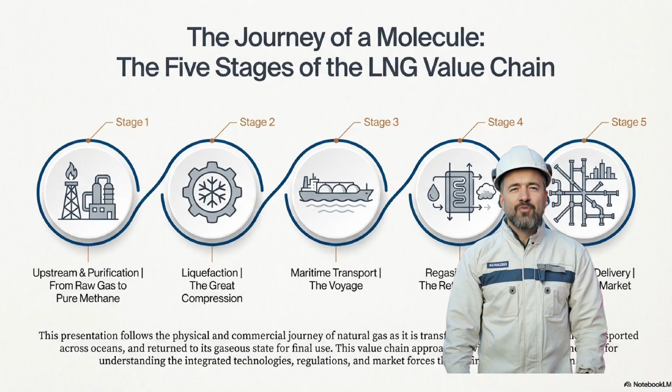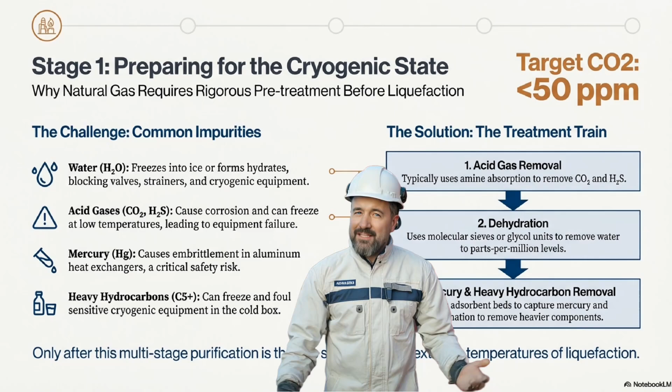Before gas can be chilled, it must be cleaned. This slide highlights common impurities like water, acid gases, mercury, and heavy hydrocarbons, and shows the treatment train: acid gas removal, dehydration, and mercury and heavy hydrocarbon capture that brings CO2 down under 50 ppm and prepares the stream for safe liquefaction.

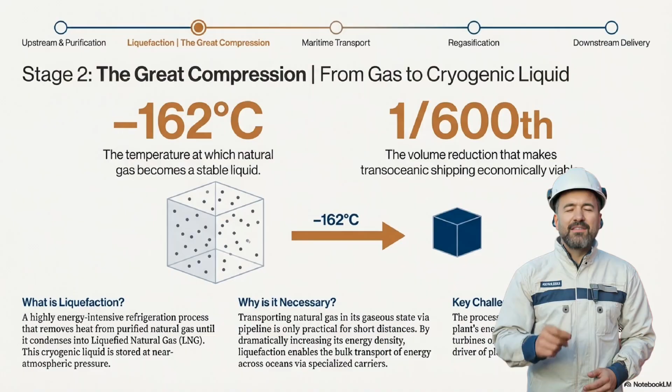Liquefaction is the great compression where natural gas is cooled to around minus 162 degrees Celsius and shrinks to roughly 1/600th of its original volume. This step makes long distance shipping practicable but is highly energy intensive. So, plant design, energy source, and efficiency are central commercial drivers of the process.

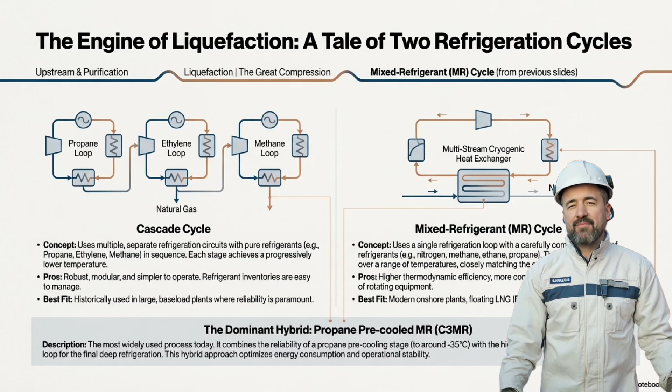The engine of liquefaction uses refrigeration cycles, typically either cascade systems with multiple pure refrigerants or mixed refrigerant loops that match cooling curves more continuously. Hybrid approaches like propane pre-cooling combined with a mixed refrigerant final stage balance efficiency, footprint, and operational flexibility for modern LNG plants and floating units.

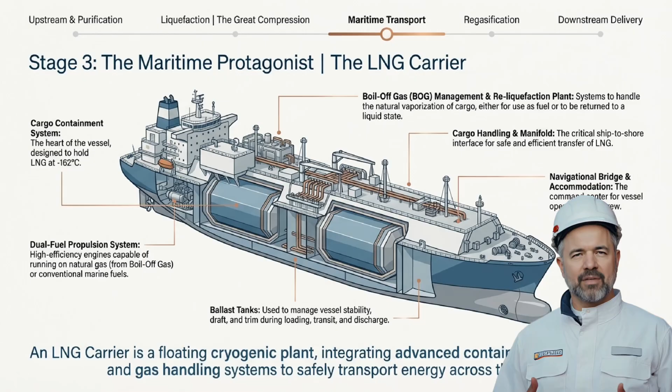An LNG carrier is essentially a floating cryogenic plant, integrating containment, propulsion, and gas handling to move cargo at minus 162 degrees Celsius. The vessel includes cargo tanks, boil-off gas systems, cargo manifolds, dual fuel engines, and the navigational bridge, all coordinated to preserve cargo integrity and ensure safe, long-range transport.

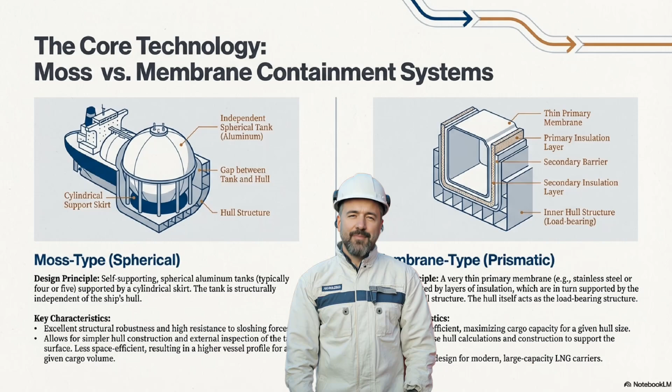Two dominant containment philosophies exist: Moss spherical tanks that are self-supporting and robust against sloshing, and membrane prismatic systems that maximize cargo volume through thin primary membranes supported by insulation and the ship's hull. Each offers trade-offs in space efficiency, structural behavior, maintenance, and suitability for different vessel sizes.

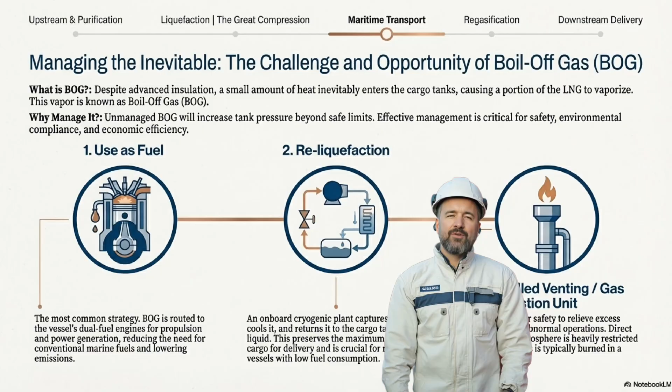Boil-off gas is inevitable as small heat ingress vaporizes some LNG, and it must be managed carefully. Common strategies are routing BOG to fuel the ship's engines, re-liquefying it on board to preserve cargo, or controlled combustion in strict circumstances. Effective BOG management protects safety, economic value, and regulatory compliance.

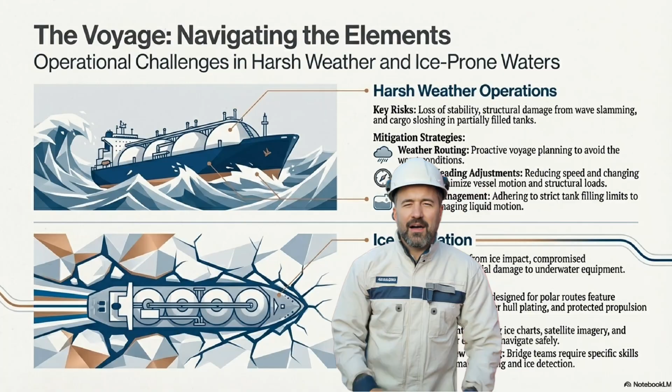Cross-ocean voyages expose LNG carriers to harsh weather and ice risks like slamming, sloshing, and hull impact. Mitigation combines weather routing, speed and heading adjustments, sloshing management through tank operational limits, ice class hull design, specialized crew training, and the use of icebreaker escorts or satellite and charting tools for safe navigation.

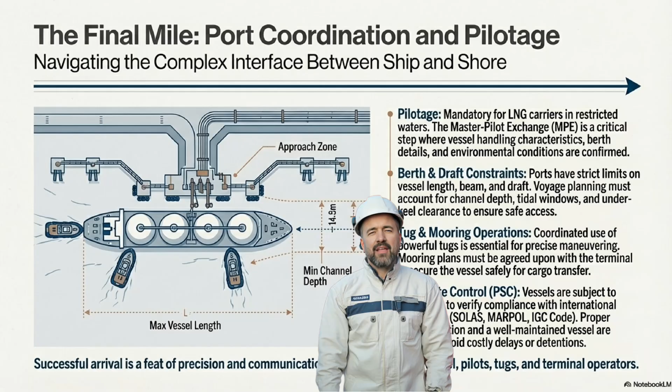The final mile at port demands precision and coordination between ship, pilots, tugs, and terminal operators. Pilotage, berth, and draft constraints, mooring plans, tug maneuvers, and port state inspections must be synchronized to protect safety and avoid delays, because successful arrival depends on clear communication and exact execution.

Regasification terminals perform unloading, short-term storage, pumping, vaporization, and send out to the pipeline grid. Their core job is to return LNG to gas safely and reliably while balancing inventory against downstream demand, which requires tight coordination between ship schedules, terminal capacity, and send-out rates to maintain supply stability.

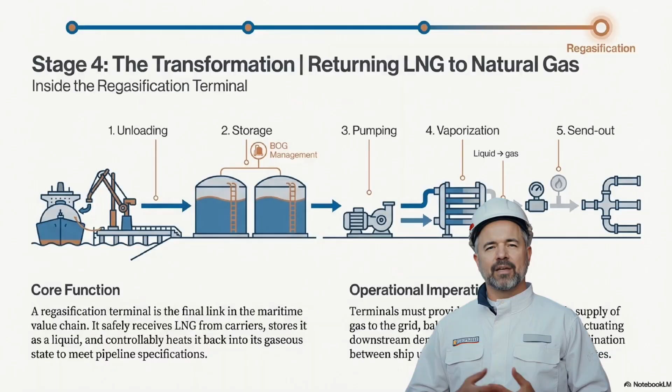Vaporization technologies each have distinct roles. Open rack vaporizers use seawater or fresh water for efficient heat transfer. Submerged combustion vaporizes LNG in a hot water bath but emits combustion products, and ambient air vaporizers rely on ambient conditions for low emissions. Choice depends on site resources, environmental limits, and operational reliability.

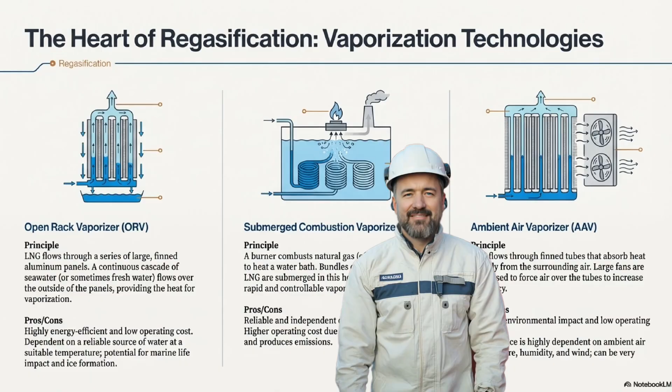Floating storage and regasification units combine onboard LNG storage with a regasification plant to provide rapid market access and flexibility. FSRUs offer speed to market, lower upfront costs, and redeployability, but require robust mooring, regulatory alignment, and matching onboard capacity to market demand and local conditions.

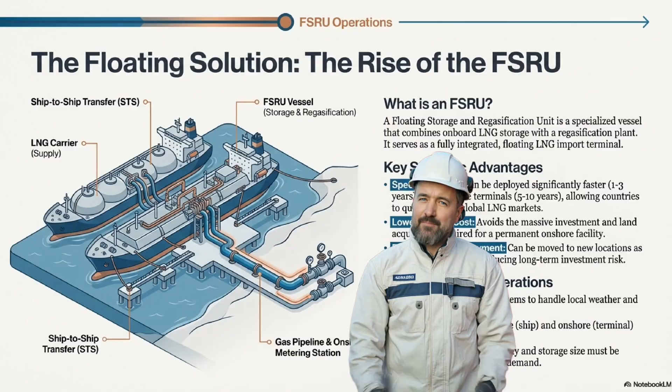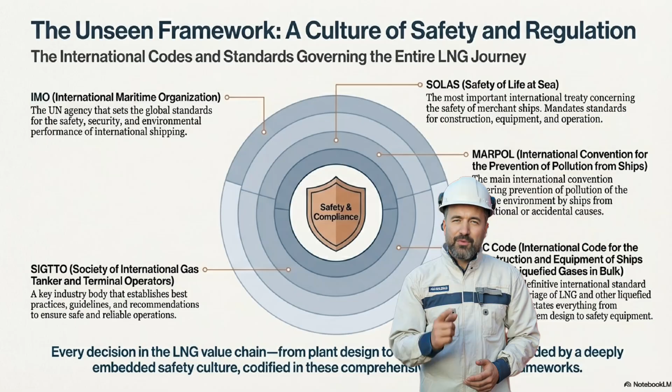Behind every technical decision sits a framework of international codes and industry standards that enforce safety and environmental performance. Bodies like the IMO, SOLAS, MARPOL, the IGC Code, and industry groups such as SIGTTO codify practices for ship design, operation, and pollution prevention, embedding a culture of compliance across the LNG chain.

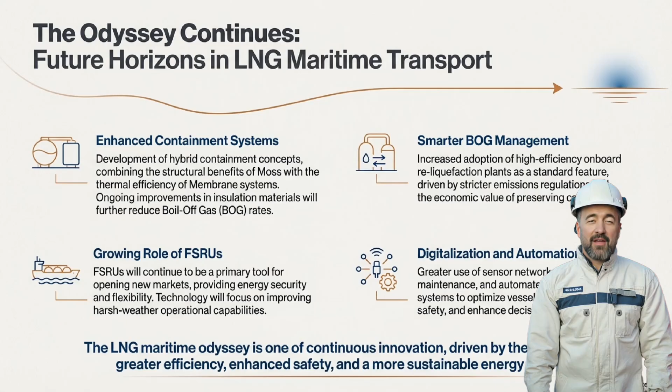The Odyssey continues with innovations that reduce BOG, hybrid containment concepts, broader FSRU deployment, and digitalization for predictive maintenance and optimized operations. These trends point toward greater efficiency, enhanced safety, and a more sustainable maritime LNG ecosystem as technology and regulation evolve together.